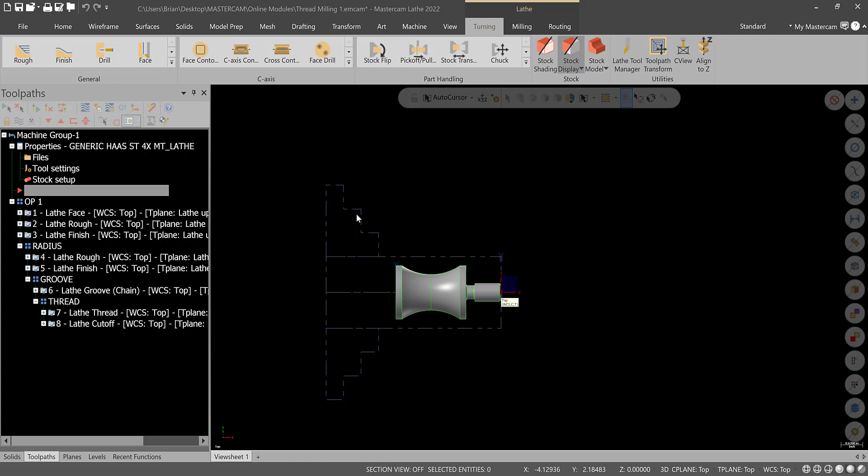Alright, so in this module we're going to take care of the half-13 threaded hole on the back side of this workpiece. We'll do that in the milling machine, and we'll use a carbide drill to drill this, and then we'll use a thread mill, a single lead thread mill, to cut this. Again, not the only way to do it, but I figure, especially for a lab, it will give people experience starting to work with carbide drills, through spindle coolant, and then thread milling.

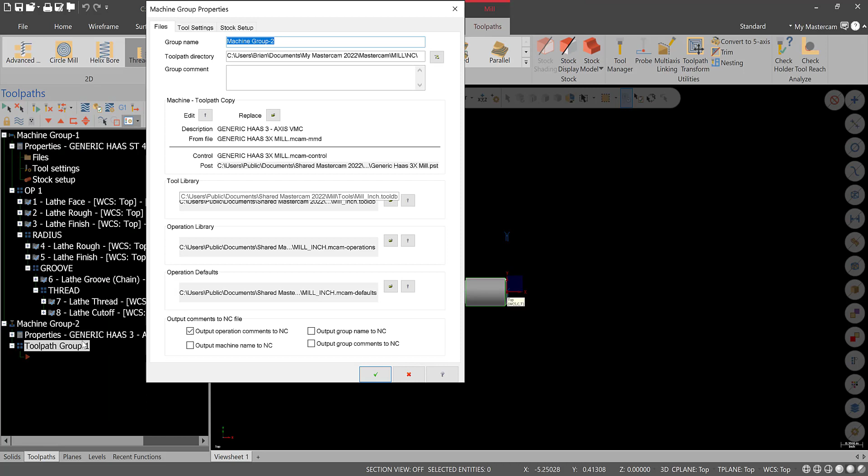So we need to do a new machine group here, a new machine group for the mill. The other option instead of doing it that way is you can delete, and you could actually go into machine, mill, and pick what you want, and that'll also put another machine group in, and it'll save you from having to replace or select a machine. So another way to do it.

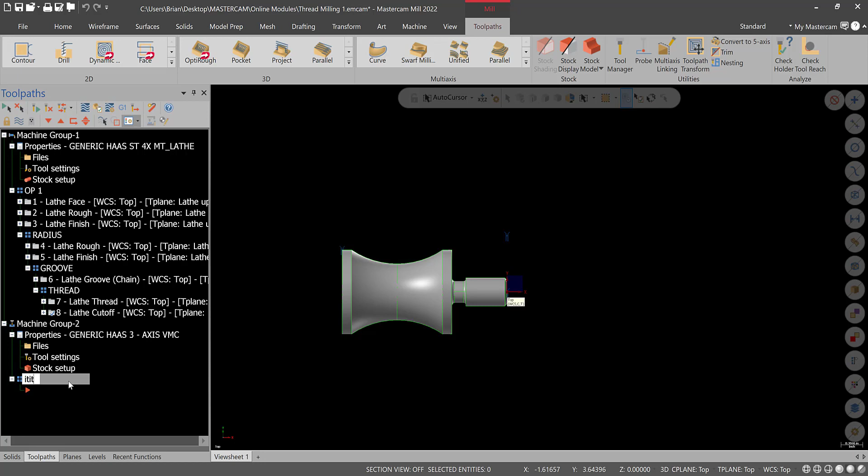What I would do now is just do stock in this case, because it's only going to be one stock model, and I am not going to bother filling this hole. I'm just going to leave it. So I'll go to stock model, and model, select the part, 3 clicks, end selection, turn the stock plane off, and green check. There's our stock model, just a reference in simulation.

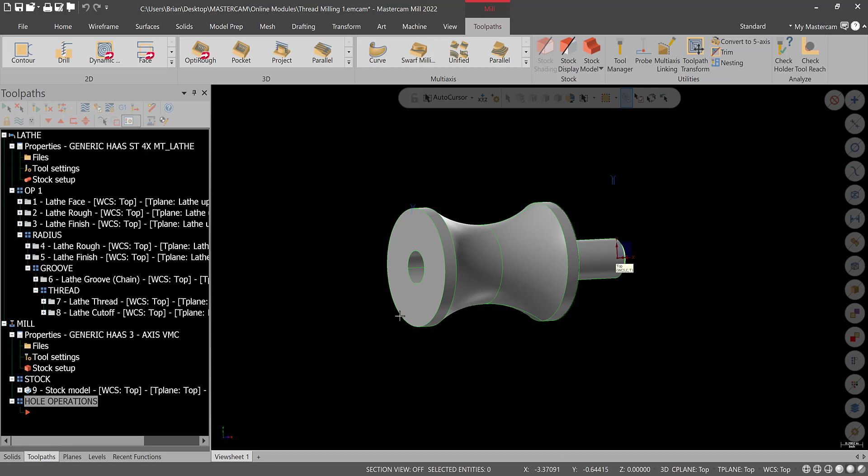I would also separate the machine groups now as lathe and mill. And then I'll do a new toolpath group up here, and rename this hole operations. Something along those lines. Last thing I'll do before we transition is go to planes and do a new dynamic plane. I'll stick it to this surface and then translate it over to the center of the bore. Make sure it's 0, G54, and then hit green check. The plane is fine. It's not worth renaming right now.

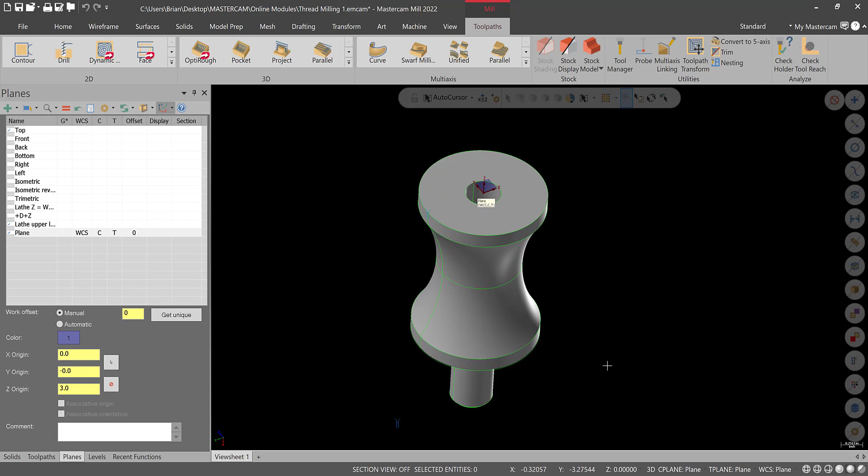Now pay attention to the instructions in the module. I may or may not have you create soft jaws and put the vise in, but you should be able to do that by now, so I'm not going to waste your time showing you how to do that. You should be able to create soft jaws that would hold this workpiece on this diameter, etc. So let's transition here and get into a little bit of drilling. It's going to be pretty much the same, except I'll talk about carbide tooling.

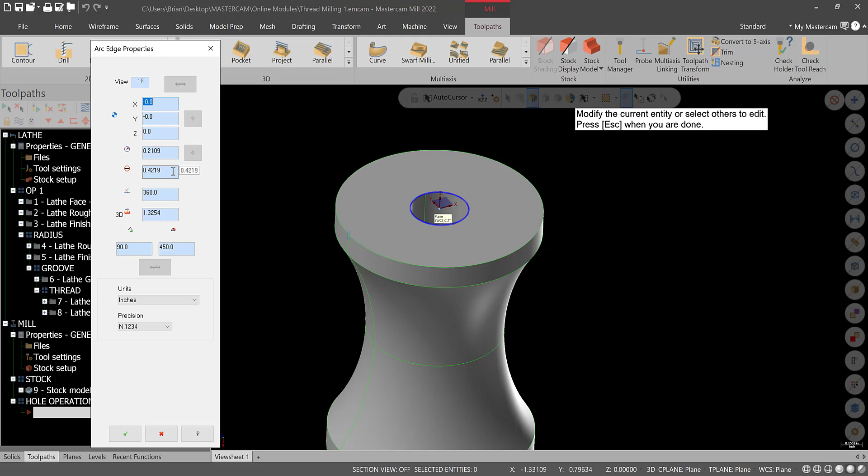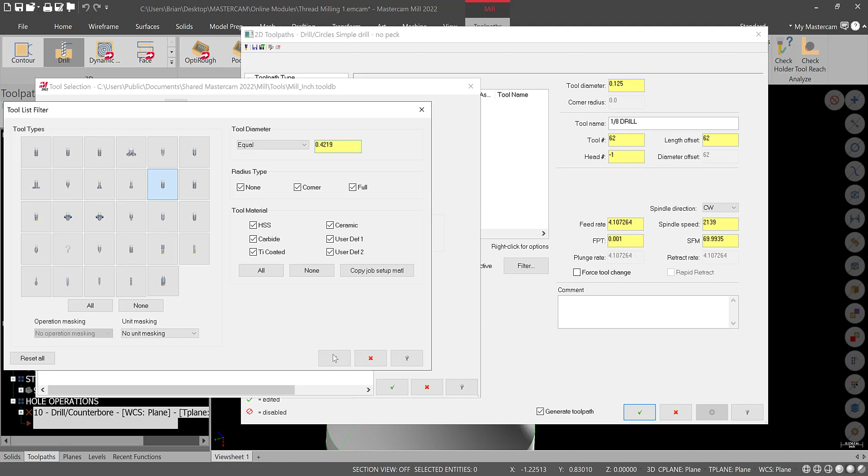Alright, so the diameter of this hole per the model is 0.4219. The spec for a class 2 half-13 thread is anywhere between 0.417 and 0.434, so that'll work for us. So we'll go with whatever size is close to the drill bit sizes available, and then go into a simple drill operation. Select that geometry and hit green check. Now the tool, I'm going to go to select library tool. I already had one, but if you go to the filter, search for it, green check, 27/64 is what we want. Call it tool 1.

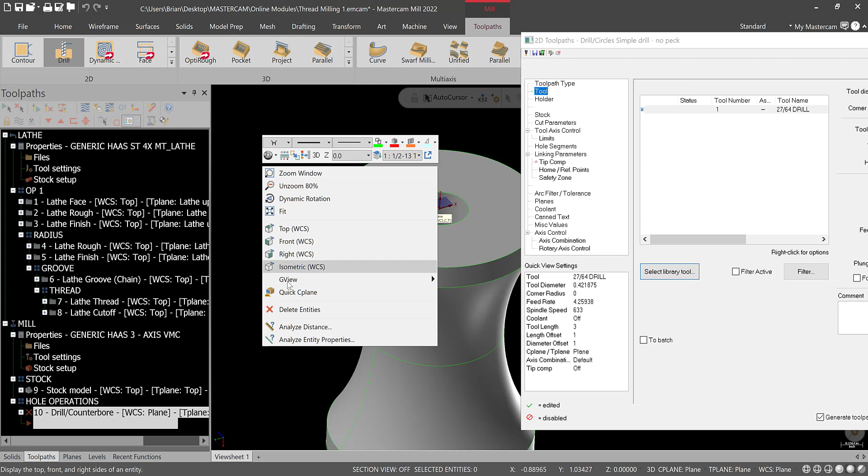I'm going to open up HSM Advisor and select a Guhring twist drill. That's carbide. Tip diameter is going to be 0.421. For the depth of this hole, we'll go back into Mastercam, right click, analyze entity properties and select that circle; the depth of the hole looks like 1.5 inches. So we'll go back into HSM Advisor and enter 1.5.

Now there's going to be no pecking, okay? That's not good for carbide drills. I've seen people do it, but you're better off just going. You have to use through spindle coolant to get away with that.

Now, look how aggressive the speeds and feeds are. It's moving. What I recommend in a learning environment is reducing each speed and feed proportionally by 50%. That's still fast, but that is what I want you to do. I don't want you to go full 100% for your first time potentially using a carbide drill, because that's moving, and you'll break something by the time you stop it. Even at 50%, it's moving pretty good. So we're looking at 510 surface footage and a 6 thou chip load.

So we'll go into here. One thing you want to change first is make sure it's 1 flute, because it'll calculate in inches per minute. If you type in the wrong variables and it's 2 flute, it'll multiply, and you'll be going twice as fast. So we want to go about 5.5, I think it was, or 6.5. Sorry.

And then we'll end up going for surface footage 5.15. Double check that. 5.10. Okay, 6.5, so it should be around 30 inches a minute. 29.6, that's good. So that's good for this drill.

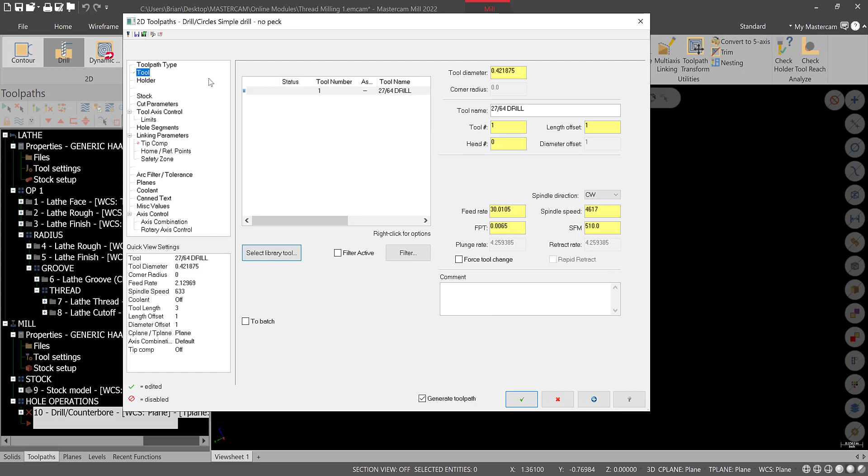Make sure for your cycle that you're doing simple G81, no pecking. Linking parameters, we'll go to the depth here. And then for tip compensation, we'll set breakthrough to 0 just to make sure that the full diameter goes to 1.5 inches. Everything else is going to be the same except for coolant. Make sure you go to through tool.

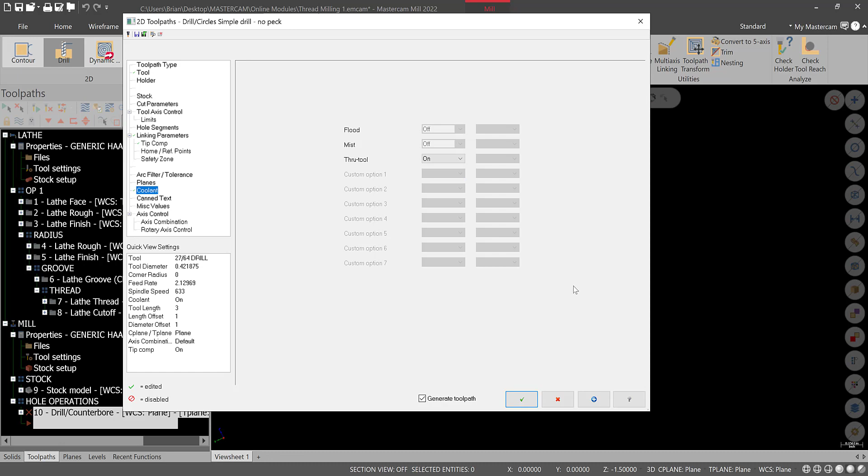Recheck. And it's not going to look any different in Mastercam. It's not going to be anything impressive in here. What's going to be impressive is when you go running the machine. You know, if you got through spindle coolant, they work really well. But the problem is they're a little more money, and if you break them, they can be very difficult to get out. So just realize that you save a lot of time not having a peck drill. So there's our drilling operation.

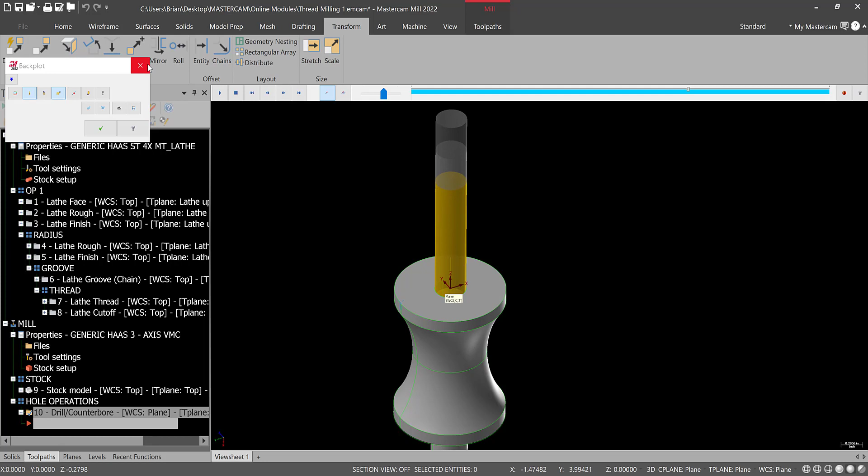Okay, and I'll transition here, and we'll come back in and create a thread mill tool and do a little thread milling. All right, so we need to do a thread mill operation, and in the shop I have their single pitch, or not single pitch, but they're like single fluted, I guess you could say, thread mills. I forget the name off the top of my head, but basically they can cut multiple pitches. It's not like an indexable thread mill or a 12 tooth thread mill where the pitch is fixed. This is not.

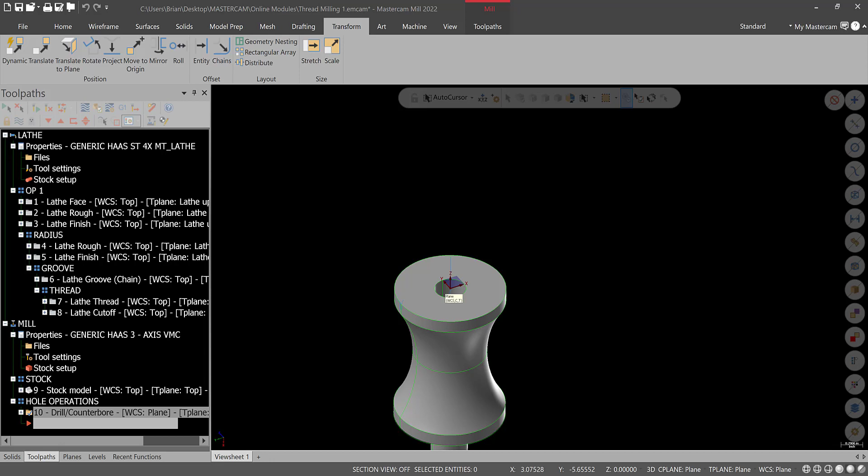I'll show you. We'll draw the tool quick, and I'll show you what I'm talking about. And I do this because not only do you get the most motion out of them for practice, but we can do different pitches with them. So let's go into our tool paths, and we'll go down here into thread mill, and we're going to select that hole again. And let's go to tool, and then I'm going to go right click and create tool. Go to thread mill, and here are the specs.

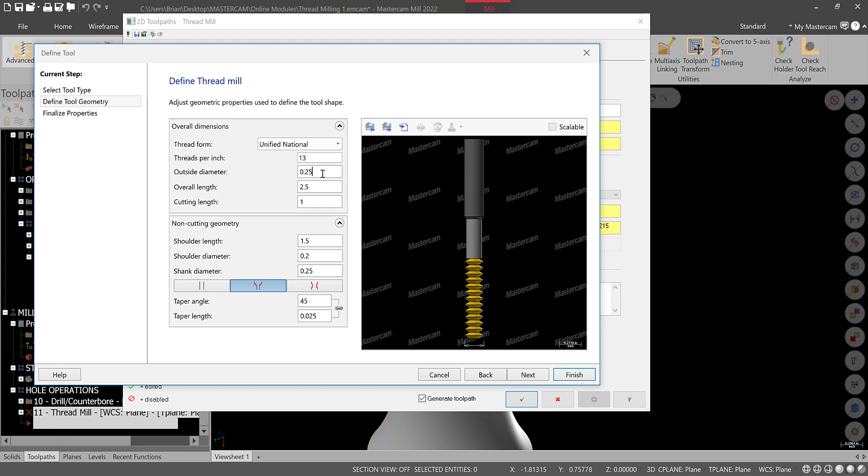So this tool is designed for 1/2-13 and other threads that are slightly less than that. Okay, you gotta think of these as the same as an ID threading tool with lathe, same kind of idea. So we're gonna go with 13 threads per inch, and again, there's like a fixed pitch thread mill, what it would look like. Ours aren't like that. Ours are gonna look something like this. Outside diameter is 0.350 on these. The overall length on these is 3.5 inches, and the cutting length is going to be 1 divided by 13.

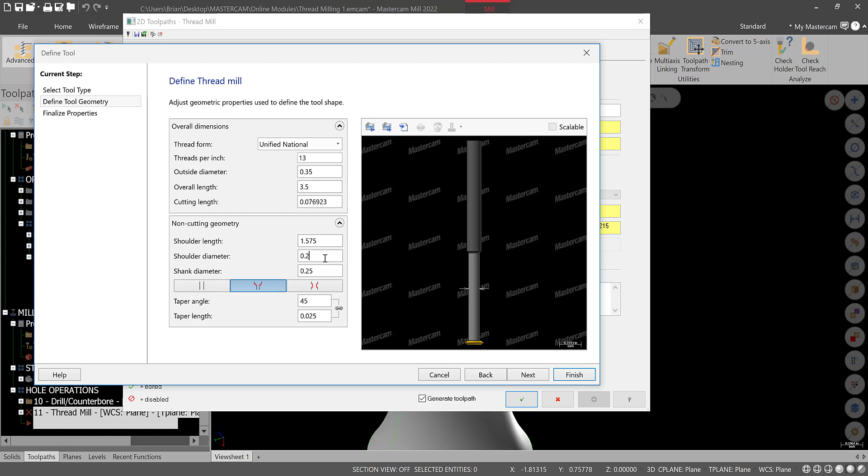So it's 1 profile. Okay, 1 full thread form. The shoulder length is 1.575. Shoulder diameter is 1/4 inch. The shank diameter is 1/4 inch. Okay, and we'll taper down. So that's sort of what our tool looks like. Okay. And that'll work for us. Finalize properties, 3.5 thread mill is fine, tool 2 is fine. There are 4 flutes on it. It is carbide. We'll hit finish, and there is our thread mill.

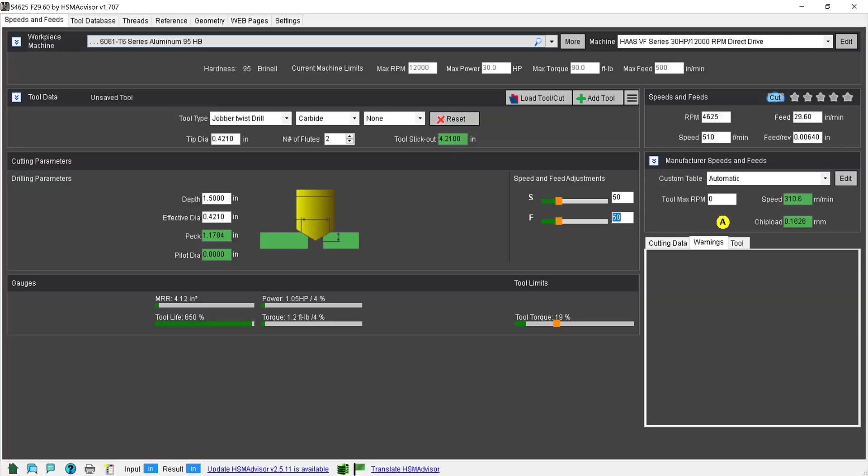Now for speeds and feeds, you can get them at HSM Advisor. If you go down to the bottom, there's thread mill, and I do depth of cut, width of cut as the same for our case because we're sort of like single point threading with the mill, if that makes sense. So depth of cut and width of cut are going to be the depth of thread, which is something like, if I remember correctly, 35 thousandths, something like that. So we'll go like, let's say 0.040 just to give us ballpark numbers. And the major diameter is 1/2 inch.

Let me double check my number of flutes here. Make sure I got that right. 4. That's correct. Finish. So let's see. I'm just double checking my speeds and feeds because you got to watch out. Oh, that's why. 0.35. That makes more sense. You got to watch out with these because it's the same idea as helix boring, where the outside of the cutter is actually moving faster than the programmed feed rate. So you really need to pay attention, not go too fast with these. There's a quick formula you could do, but I use HSM Advisor a lot. So you just got to be careful of that.

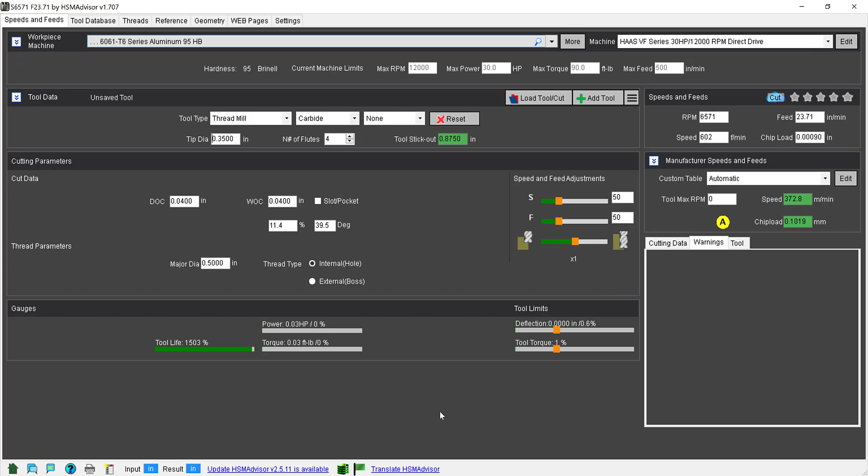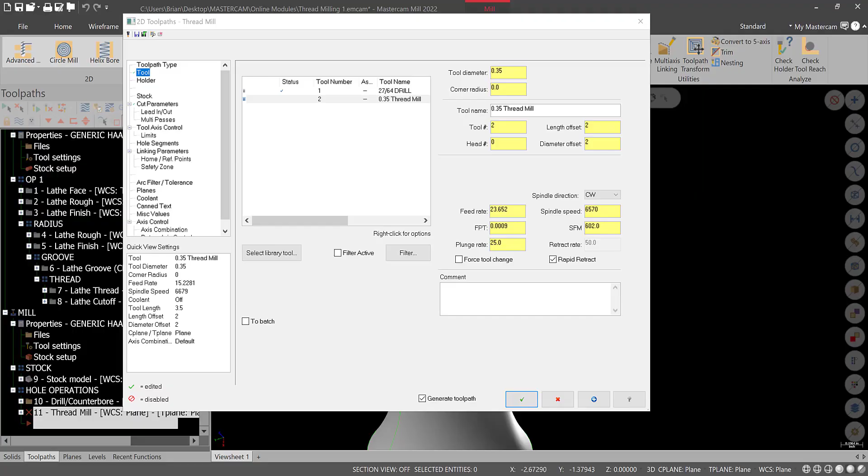So we should end up with a surface footage of 602, because I did not put in the right size of cutter, and a 9/10 chip load. And we get 23.65 and 6,500. That's correct. So that's what we're looking for. And that was my fault. I did not have the tip diameter right. That was still the 421 from the drill. So we're good there. Let's get into cut parameters.

There's one active tooth. This is a good picture of an indexable thread mill with a fixed pitch. We only have one active tooth on our cutter. The thread pitch is, again, 1 divided by 13 for half 13. Okay, so 0.076923 is correct. This is an ID thread.

We're going to override the specifications. The major diameter, in our case, is going to be 0.5. The minor diameter is 0.421. We're going to go from top to bottom. I know it's conventional milling, and we usually go from bottom to top, but it is less intimidating the first time you do this to start in and thread down.

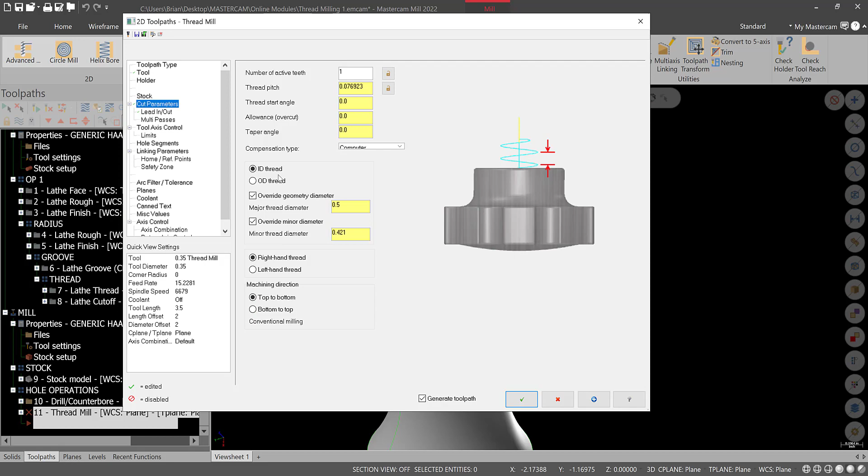It is a right-hand thread. Lead in, lead out, we'll leave default. Multi-passes, we really probably don't need in aluminum, but I'm going to turn them on anyway just to show you how this works. I'm going to end up going like 7 passes at 10 thousandths. Okay, just work our way in nice and easy.

Not a big reason to do that, but I do that a lot on parts, especially if it's like stainless and it's only one flute tool, because I want the tool to last throughout the job. I think I get a cleaner thread that way. Now, if I'm using an indexable cutter or a fixed pitch cutter, then I may not do that. You can do it 2 passes maybe. Depends on the size of the thread and what the material is. Lots of variables here. So this will give us some good motion and hopefully not wear out the thread mills.

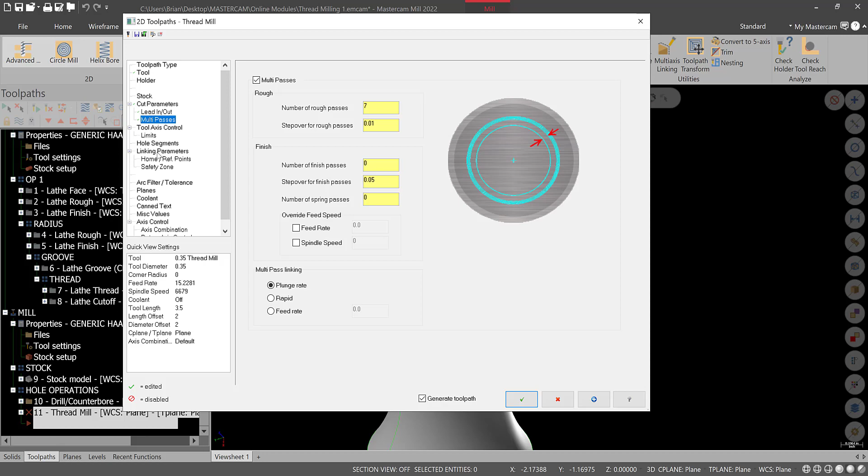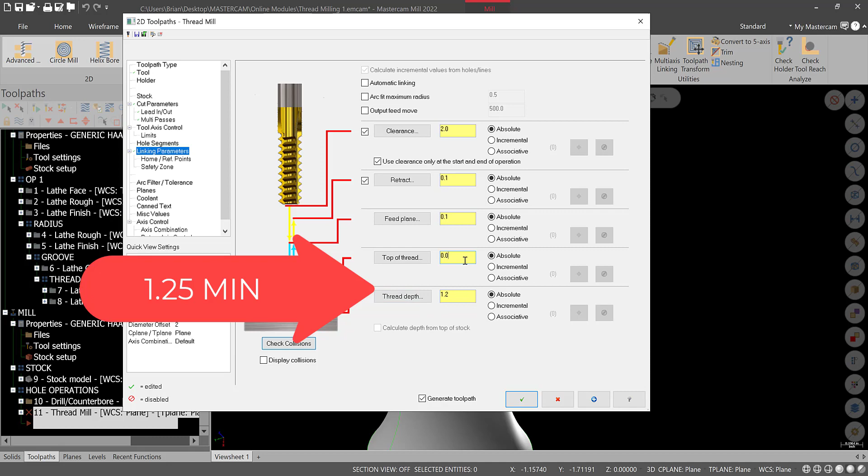The thread depth. Now, I forget what the drawing said. I don't have it open right now, but I'm just going to go absolute for all of these. And we'll go 2 inches here. 0.1 on the retract. Feed plane's fine. I think it was like 1 inch minimum, so we'll go 1.2. Should be fine there. Minus 1.2. And as far as everything else, we'll turn flood coolant on. Plane should be fine. That's it for now.

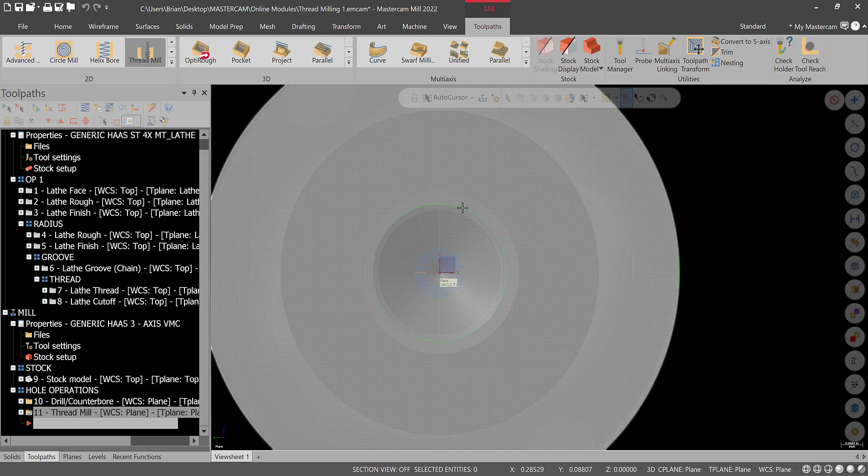So let's hit green check, and you'll see our toolpath. One of the things I like to do with thread mill is go to top view, and I will go down in the lower right. You can make the model transparent. I will backplot this operation, and using the S and B icons, I will watch the yellow go in, the yellow of the edge of the cutter. Or you could also go to front view and watch this go.

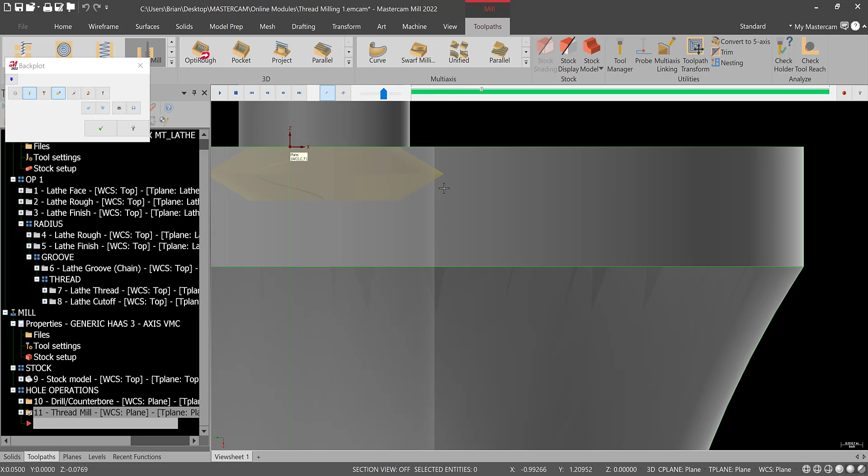So there we are, and you'll see we're taking a nice easy time in. You can gauge your cuts that way. It works its way in. Alright, so there's our last pass. Looking at it here. There we go. So you see that's full depth. Okay. And it works its way down.

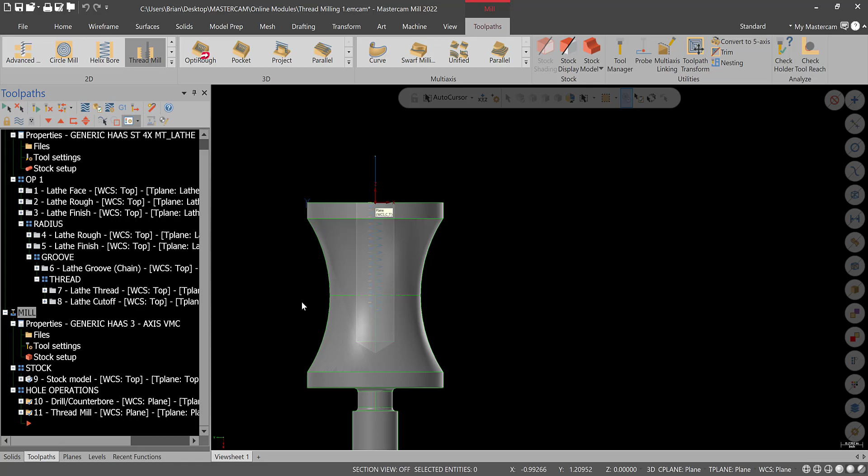So let's go ahead and we can look at both these operations and verify. So stock model 1 is good for us. We'll go into verify. There we go. So the drilling operation is not a big deal. Nothing exciting there. And let's take a look at the thread mill. So we'll slow it down. And I'll just hit S and work my way through.

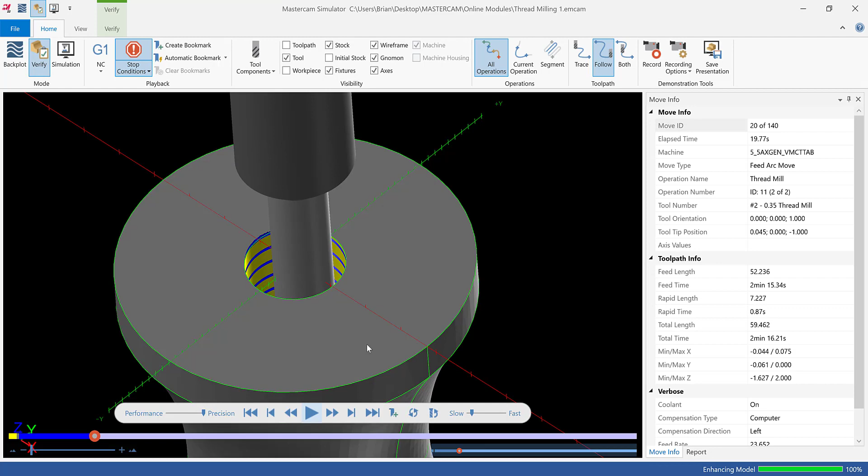There we go. So pause it and go back, and you can watch it work. But I'll go back again and just reset this. You don't really need to do the drill op either, if you just want to go through the thread mill. So there we are. So it works its way in. It cuts a little bit. That's perfect.

And sometimes what I'll do is I'll actually do a 1 inch depth of threads, and I'll count the pitch, just to double check. This is just another thing I do sometimes. I'm worried about it. I usually comp these at the machine. Comp the tool to cut big by like 10 thou just to make sure you don't go undersized. We'll be checking this with a go no go gauge.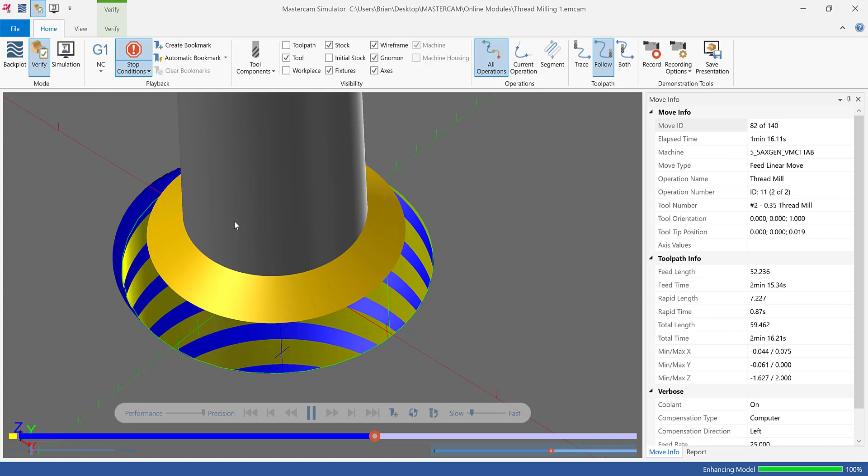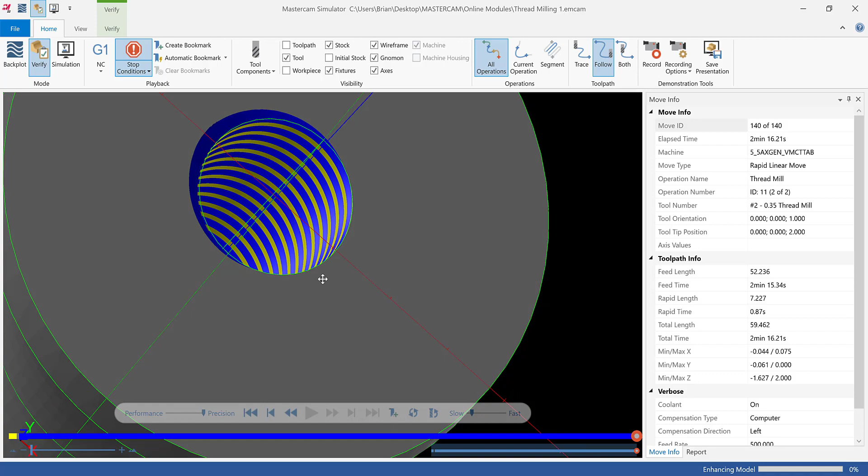Now I'm just holding S and going through. You see, we're taking our time. Not a big deal. These tools are kind of expensive, so I don't want to risk breaking them. Again, we'll slow down to hit play at this point. There we are. So we got plenty of clearance down here. Thread mill looks pretty good. I don't see any issues.

Okay, one thing I do sometimes is I'll take the thread mill and I'll do a 2D chamfer around this to get rid of the lead-in. That's up to you if you like to do that. Again, you should be able to know that by now. I would do that first and then thread mill. Same I did in the lathe. You prep the chamfer to lead into the thread and then thread.

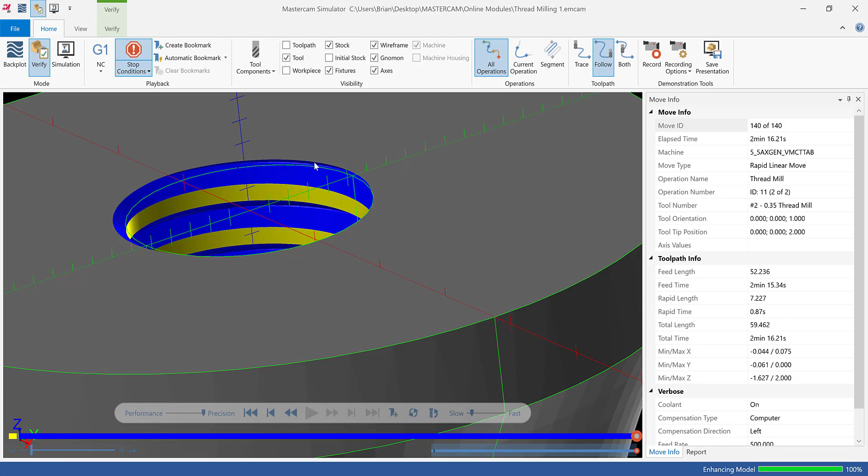It'll avoid this burr here. But that's up to you. I'm not going to worry about that. You should be able to do a chamfer by now. This is just trying to keep a short video on thread milling. So there's our specs. Okay. That's really it for this one. So there's our drill and thread mill.

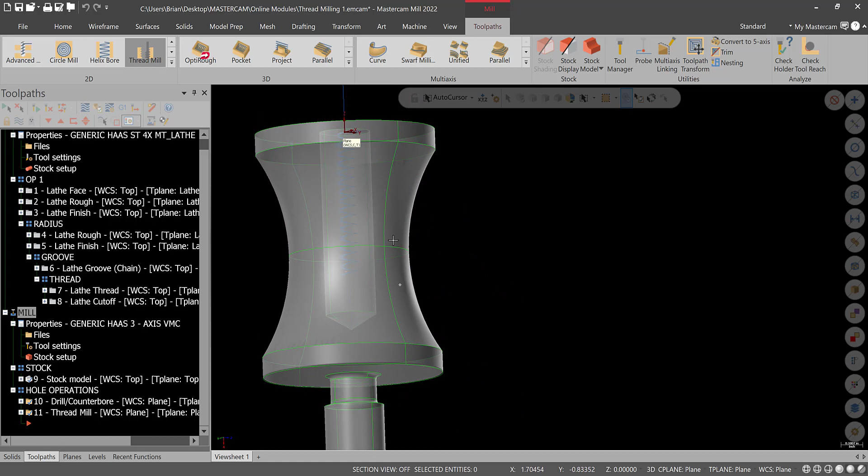On that other part, and again, make sure you read the written instructions in this module and double check the drawing for the depth. I thought it was a 1-inch minimum, but again, you can change that quick. So make sure you pause by the thread mill specs.